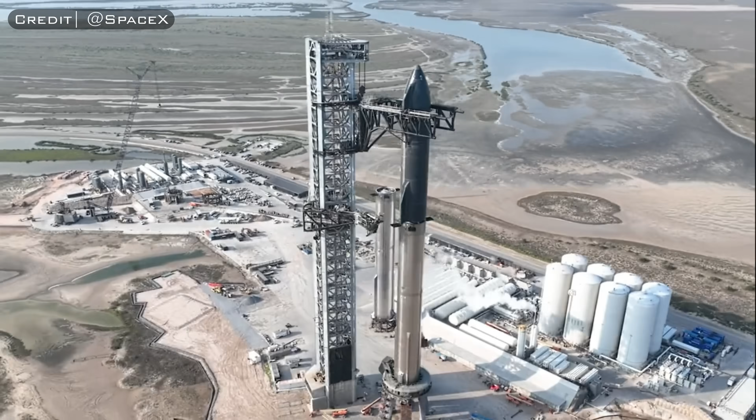Meet Starship, the largest and most powerful spacecraft ever attempted. Skipping over all of the incremental milestones that will come before, SpaceX's long-term goal for Starship is to enable them to send 1 million humans to Mars by the year 2050. I know, right? Sounds like a pretty tall order.

To accomplish this, Starship will not only have to be 100% reusable, but it must be rapidly reusable. In this case, the word rapid means we should eventually expect to see multiple launches in a single day from the same launch pad. For this reason, the vehicle, and more importantly the launch system, will need to be extremely robust. But what does a robust launch system even look like?

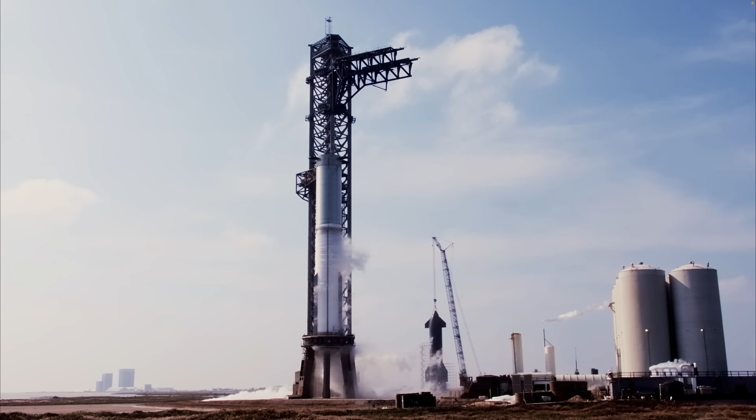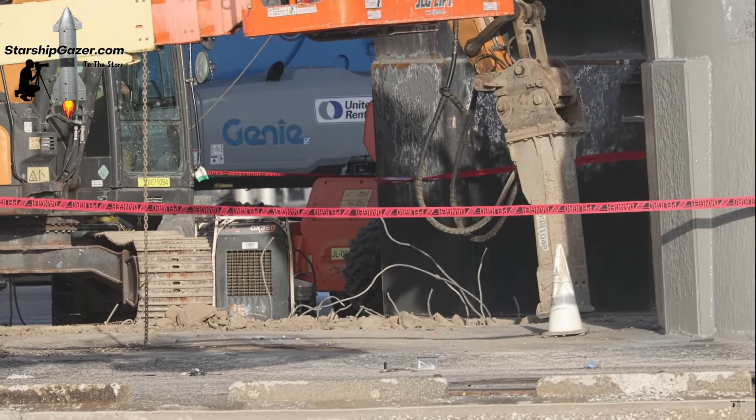Well, for one, it won't be partially destroyed every time the Super Heavy booster ignites more than 10 of its Raptor 2 engines. Following both of the last two static fire attempts, we have seen SpaceX replace the concrete pad underneath the launch mount, even after upgrading it to a higher strength, explosion-resistant concrete blend. Each time, this required 2 weeks of work to make the necessary repairs.

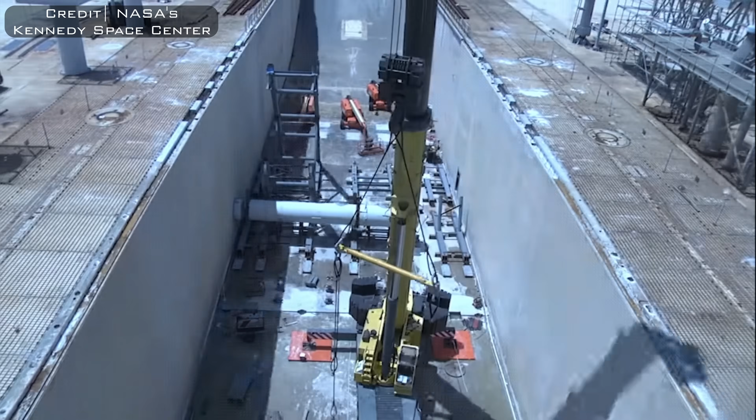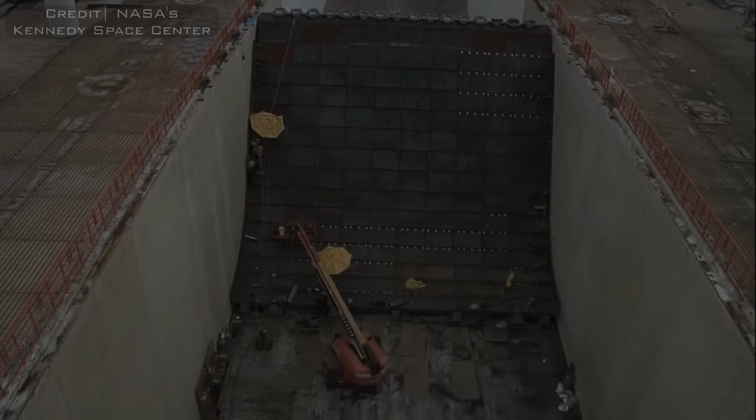As expected, this has fueled more debate by fans and critics alike that SpaceX seriously needs a flame trench underneath the launch mount. It's pretty clear that SpaceX does not have plans to do this, though. And in reality, it's not really possible without a complete redesign of Stage 0. So, should we really expect SpaceX to continue spending 2 weeks replacing the concrete in between every static fire and launch? Or is there something that we all missed?

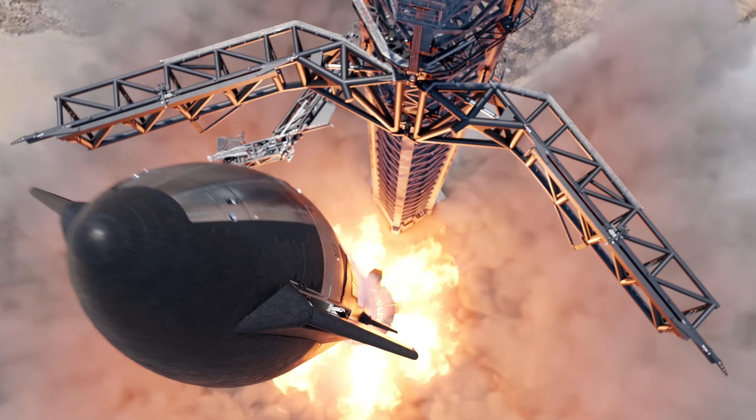There's been a lot of hype lately about whether or not this concrete pad underneath the launch mount might be the Achilles heel that will prevent Starship from ever achieving rapid reusability. For example, let's take a look at what Marcus House from the Marcus House Show had to say about it.

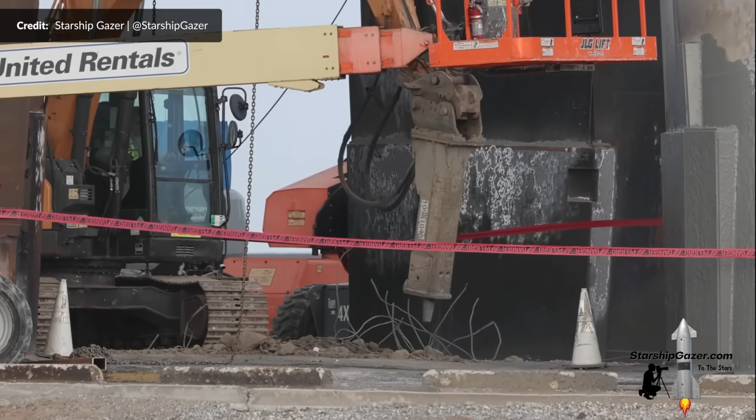I mean, we know that the ultimate goal by SpaceX with Starship is to create this fully reusable rocket. At the rate this is currently going though, maybe SpaceX should instead be setting up an expendable pad production line. I'm joking of course, but yes, it does seem like this will remain a continual problem until a new solution is found.

I even went so far as to start factoring in 2 weeks for orbital launch pad repairs into my calculations when trying to predict the most likely date of the first orbital flight test. 4 weeks if they decided to perform a 20-something engine static fire test before they jump up to firing all 33 at the same time. As you can tell by the title, I have since reversed my opinion on account of a simple yet important piece of evidence that I discovered last week.

In order for any of this to make sense, I'll need to start by giving you all a little background information so we're all on the same page about why this is even relevant in the first place. It all started the day after the 14-engine static fire test on November 14th of 2022. As of the time of recording this episode, this is the most engines we have ever seen tested on the Super Heavy booster. During this test, we witnessed something that I think we can all agree was truly terrifying, yet absolutely spectacular to watch all at the same time.

After the moment of ignition of the 14 Raptor engines, LabPadre's Rover 2 cam was shaken so hard that it caused the camera to pitch forward so it was pointed at the ground instead of at the launch mount. Initially, this was a bit disappointing. However, it forced us to focus our attention on the brief hailstorm of hot concrete as it began to precipitate into the street.

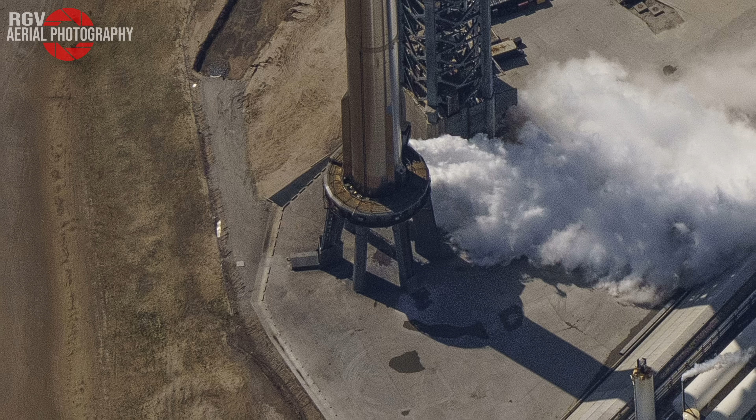There were some questions as to whether or not this was debris from around the launch pad or if it was truly coming from directly underneath it. Thanks to LabPadre's Predator camera, we were able to see the temperature of the rocks as they came to rest in the street after traveling several hundred feet through the air. This pretty much eliminated any remaining doubt as to where this material originated from.

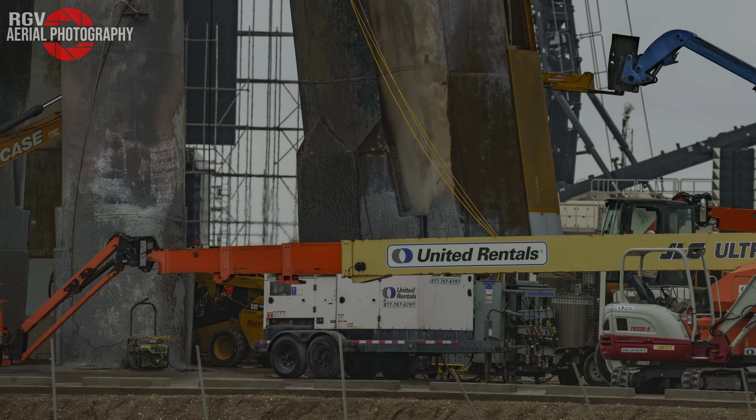Unfortunately, due to poor weather that persisted in the area for 2 weeks straight, Mauricio from RGV Aerial Photography wasn't able to perform a flyover in time for us to get a bird's eye view of the damage. From the ground, we were able to identify a single deep crater in the concrete. However, it was difficult to see much else because there was so much heavy machinery equipment underneath the table.

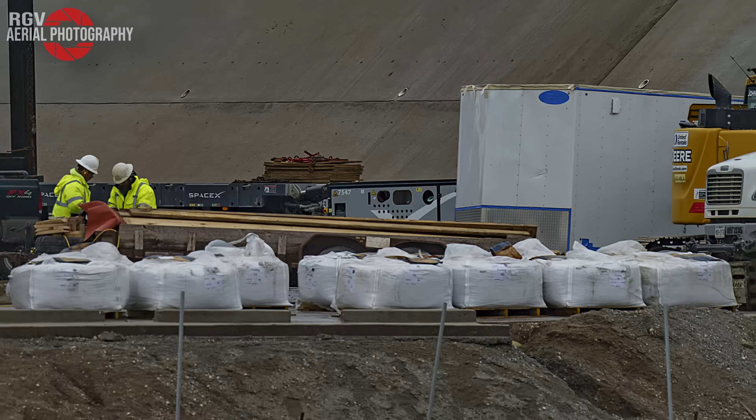What Mauricio did find, however, was several pallets with white bags on top of them, which had a label from the manufacturer with the name Fondag RS in big letters. Those of you who follow CSI Starbase on Twitter or watch the RGV Aerial Starbase weekly livestream from that week may already be familiar with this.

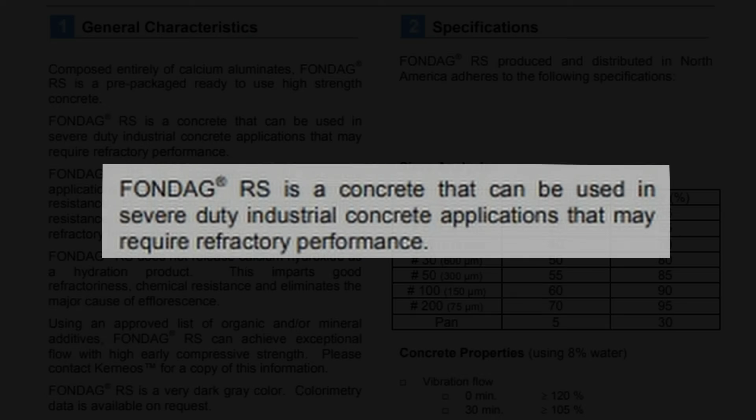Reading from the Fondag RS datasheet, we can see that inside of these 3,200-pound bags is a specialized, high-strength concrete designed for use in industrial applications that may require refractory performance. The word refractory refers to the material's ability to resist decomposition by heat, pressure, or chemical attack. This substance in particular is meant to withstand exposure to temperatures up to 2,000 degrees Fahrenheit or about 1,100 degrees Celsius. It also has a compressive strength of more than 7,500 psi.

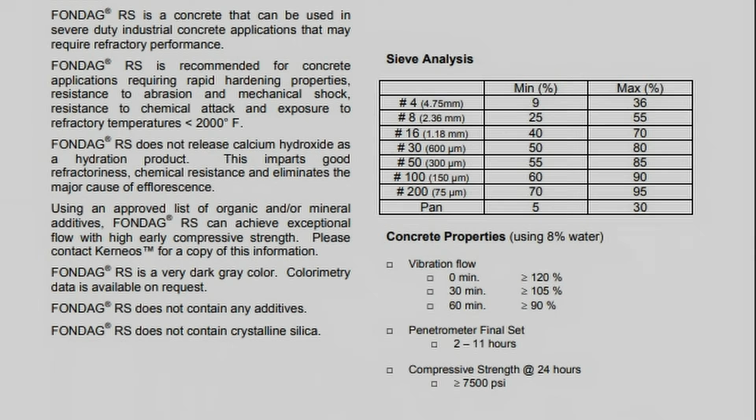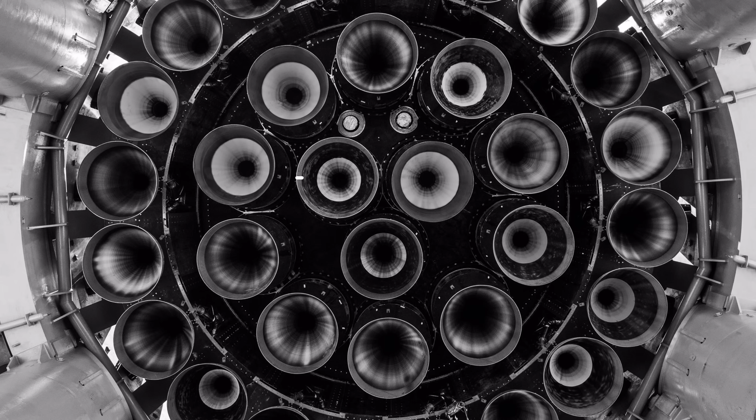So knowing this, let's do a little math to determine whether or not we should expect this material to survive the abusive smackdown that will be handed down by the Super Heavy Booster's 33 Raptor engines. Let's start with the compressive strength first because that's the easiest to explain. I'm going to simplify this by only considering a single engine here. According to SpaceX, the diameter of the exit of the Raptor 2 engine is 51.4 inches, which gives us an area of 2,075 square inches.

Now, let's make a few assumptions here. First, let's say that 100% of the thrust generated by this engine is applied directly to the ground. Let's also assume that the area this force is being applied to is a circle of the same radius as the nozzle exit. To all of you engineers out there, the reason I'm making these assumptions is to provide an overestimate for the destructive potential of these engines. In reality, the plume will spread over a larger radius, and the force exerted on the ground will be significantly diminished.

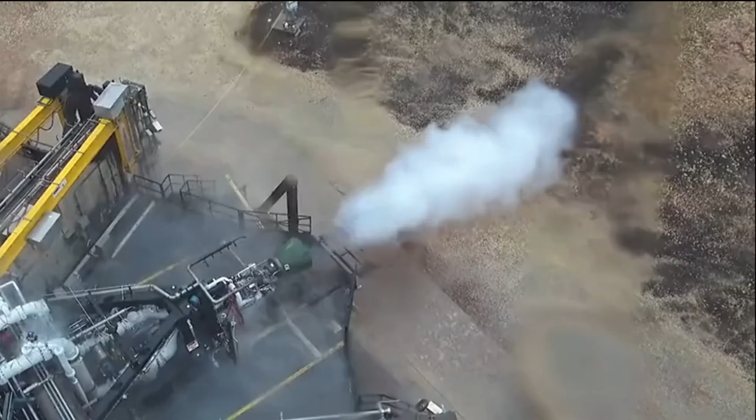Raptor 2 engines are known to produce at least 510,000 pounds of thrust. Dividing that by the area of the circle gives us 245 pounds per square inch. This is well below the 7,500 psi that this concrete is rated for. By my calculations, this Fondag RS should be able to withstand up to 30 Raptor engines all pointing down at that same 51-inch circle at the same time.

Okay, so now that we know that the Fondag RS is more than strong enough to withstand the compressive force of the exhaust flow, let's talk about its resistance to thermal energy. The reason thermal energy is an important consideration is because of the tendency for concrete to explode if it's heated up beyond a certain point. This phenomenon is called spalling. The reason it happens is because even after it's cured, there is still residual moisture trapped within the concrete. If the concrete is exposed to temperatures exceeding 212 degrees Fahrenheit, which is the boiling point of water, the moisture in the concrete will turn into steam.

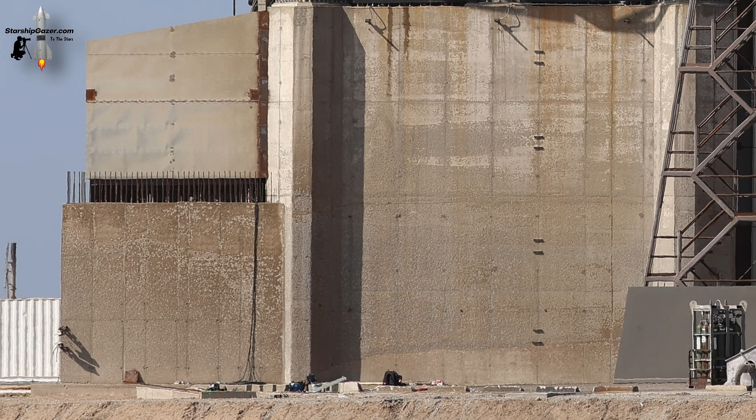The formation of steam will cause pressure to build up inside of the pores of the material, and without anywhere for the steam to escape to, the pressure will exceed the strength of the concrete and cause fragments to break off in an explosive manner. You can see evidence of this all over the base of the Orbital Launch Integration Tower. It's important to note that the more heat you apply, the more severe the spalling damage will be, especially if it's over a large area.

So we need to know what kind of temperature to expect on the surface of the pad underneath the launch mount. Again, we're going to simplify this down to a single engine. It was difficult to find the temperature data for the Raptor exhaust plume, but luckily one of our agents, codenamed Oscar the Grouch, was able to locate some information in Appendix G of the FAA's Programmatic Environmental Assessment. The purpose of this section of the report was to estimate the far-field exhaust constituents of the SpaceX Raptor 2 Methalox booster rocket engine firing under sea level conditions.

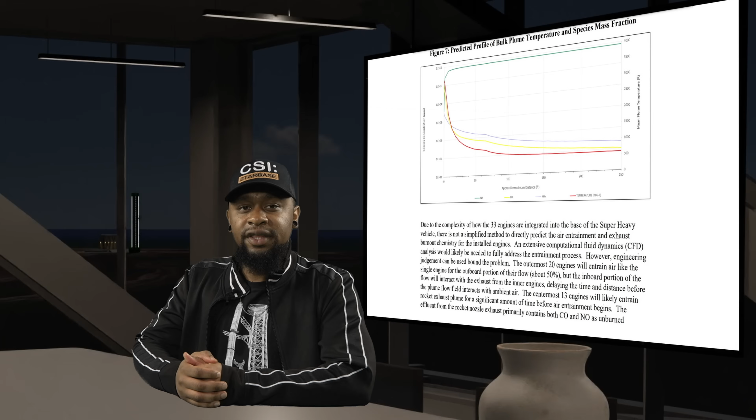Essentially, this was an emissions test, which conveniently included a table showing the predicted exhaust plume temperatures at different distances below the exit of the nozzle. We can ignore the green, blue, and yellow lines and just focus on the red one. From this data, we can see that as the exhaust leaves the nozzle, the temperature of the plume will be around 3,500 Rankine, which is equal to about 3,040 degrees Fahrenheit.

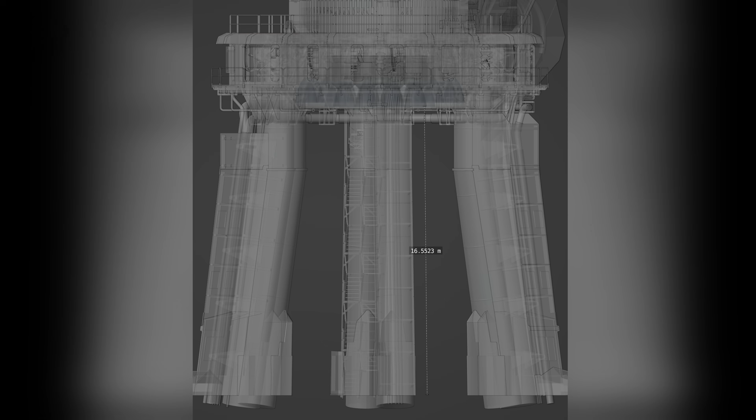That's pretty hot, and it's actually on par with the temperature from the exhaust of the Space Shuttle solid rocket boosters, which are also used on the Space Launch System. Now, in order to determine the expected temperature on the surface of the concrete, we need to know the height of the bottom of the engine bells. Thanks to Ryan Hansen Space, we can say that this is roughly 16.5 meters or 54 feet above the pad.

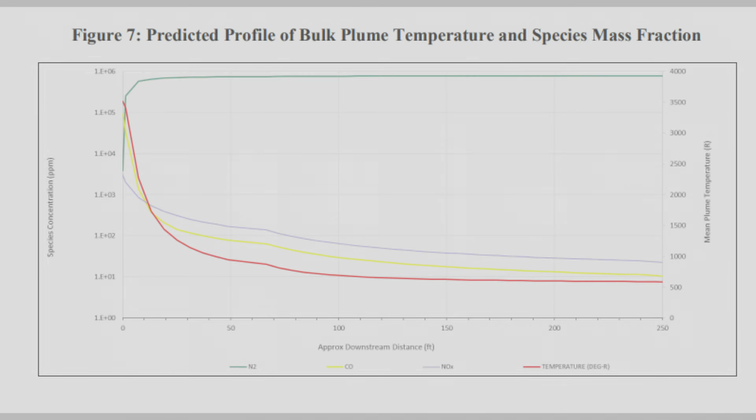So according to this chart showing the drop-off in temperature as a function of distance, at 54 feet, we should expect the exhaust plume to have cooled to about 800 Rankine, and that's 340 degrees Fahrenheit or 170 degrees Celsius. Not as hot as you might expect. However, this is still hot enough to cause the spalling effect in regular concrete, which is something we have clearly seen on each of the static fire attempts so far.

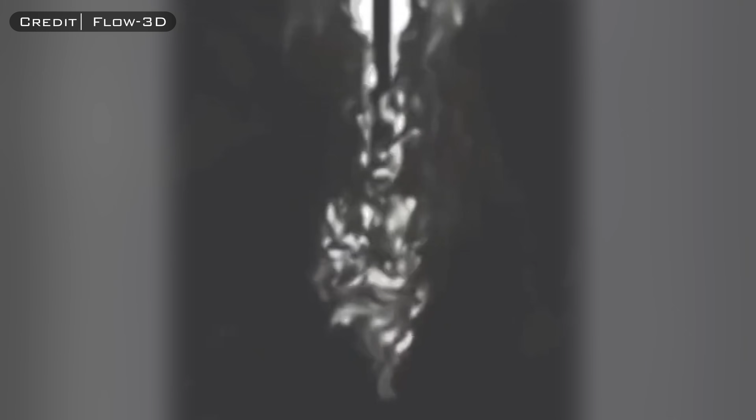This datasheet does not provide information for what to expect during a 33-engine static fire test, however, and that is important to note. During a single-engine test, the exhaust plume is surrounded by ambient air. The exhaust flow will mix with the ambient air along the boundary layer, which is called air entrainment. This rapid air entrainment is what causes the drop in temperature downrange. When all 33 engines are firing, the dynamic of this situation changes completely.

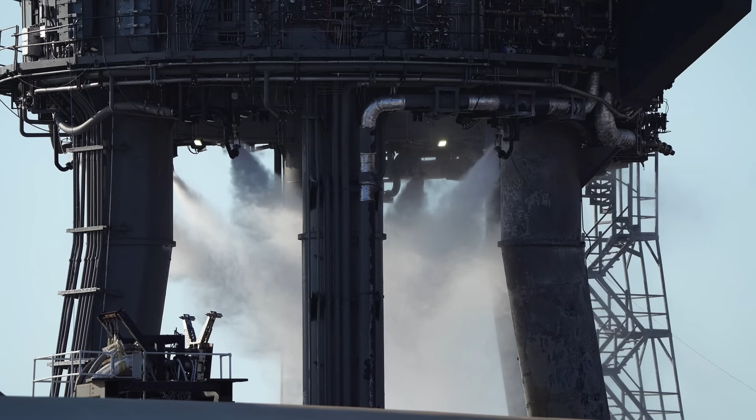Let's consider the outer 20 engines first. Looking at this from below, you can see that on what SpaceX refers to as the outboard side, the exhaust flow will experience entrainment with the ambient air. To some degree, it will also be affected by the Firex and detonation suppressant system, although that feature of the launch mount is not given consideration in this report.

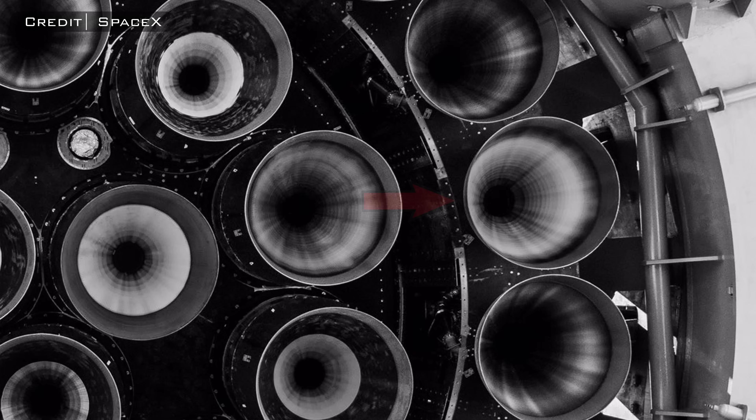On the inboard side, there are 13 center engines firing at the same time as the outer 20, so instead of mixing with ambient air, it will actually experience exhaust entrainment. This exhaust entrainment also happens on the sides facing the two adjacent engines on the outer ring. According to the report, this is approximately 50% exhaust entrainment for the outer 20 engines, but for the center 13, it's 100% exhaust entrainment. There is no ambient air inside of this column of fire to help with the cooling of the exhaust flow. So in the center of the pad is most definitely where the highest temperatures will be found, although we don't know the exact value to expect.

So 340 degrees is our low-end estimate, and as long as it doesn't exceed 2000 degrees towards the center of the pad, then this Fondag RS should do the job. Keyword should.

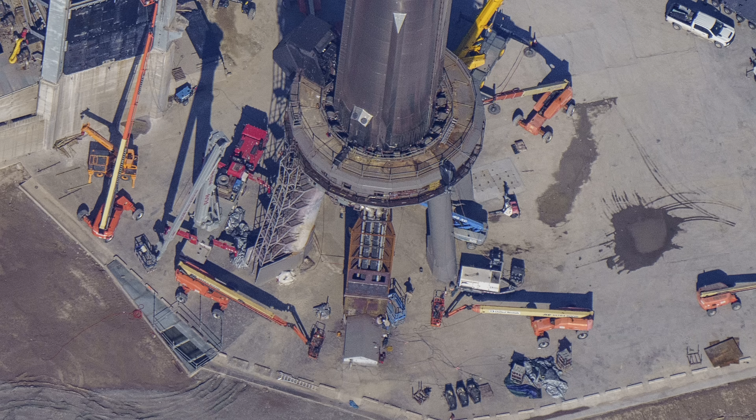All right, so continuing where we left off, we now know that Fondag RS should be more than capable of surviving the brutality of the Super Heavy Booster's 33 Raptor 2 engines. On November 27th, Mauricio took this photo of the freshly placed pad under the launch mount. From our understanding, this was taken the same day that the Fondag was laid. You can even see the power trowel still down there applying the finishing touches to the pad.

Less than 48 hours later, on November 29th, after giving it the absolute minimal time to set and cure, SpaceX performed an 11-engine static fire test. There were fewer engines tested here than in the previous one, however, it was for a longer duration because SpaceX wanted to test the autogenous pressurization system on Booster 7.

At first, we thought the new pad held up pretty well. It appeared there was less debris this time, but that was until we checked Epic Spaceflight's hoop cam and realized that the same concrete hailstorm occurred yet again. Apparently, the wind was blowing more to the north this time. The amount of shrapnel seen falling from the air was significant, but it wasn't as bad as the previous test.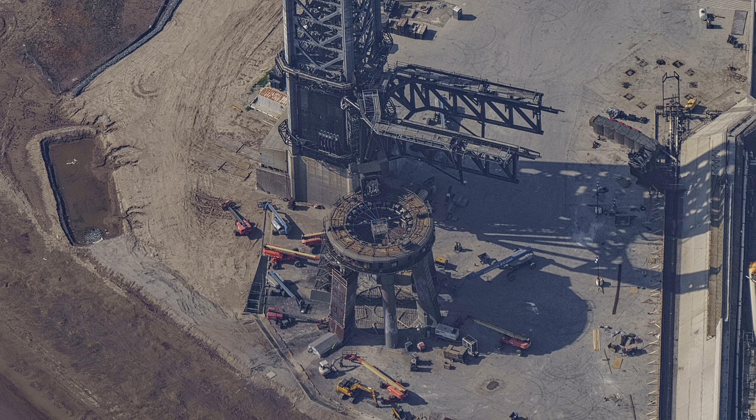This time around, we were able to get an aerial view as they began preparing the foundation for laying more Fondag underneath the launch mount. I think when these images came out, a lot of people were confused about what was going on here, and there was speculation about a possible flame diverter being installed under here, but what you're seeing here is just wooden framework laid out in a pattern.

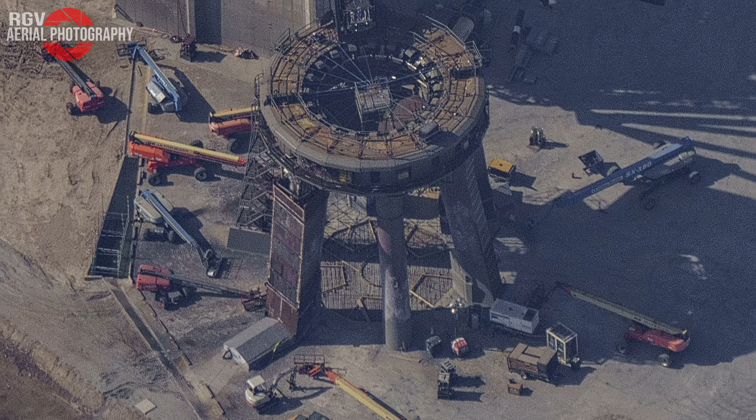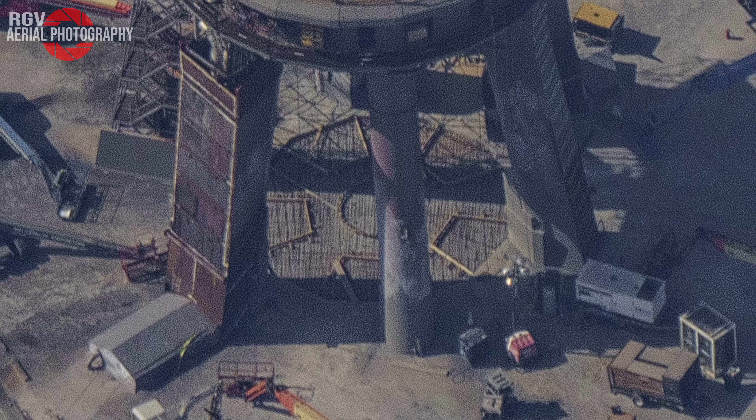This pad is very large, so it must be laid out in sections instead of doing the whole thing at one time. Once the areas that are enclosed in formwork are completed, the forms are removed and then the edges of the concrete become the forms for the remaining sections. Nothing really special going on here. So over the next week, SpaceX used the Fondag RS to reform the pad. The bags had been temporarily moved near the suborbital side of the launch complex to get them out of the way during the previous static fire.

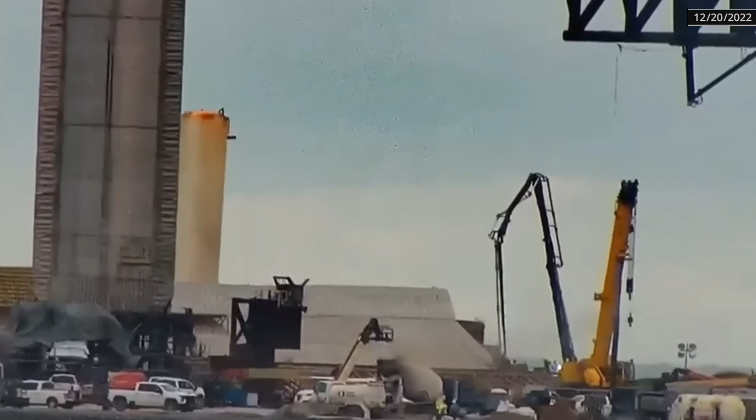SpaceX brought in an empty mixer truck for the special job. It was a difficult one too because the wind was clearly not cooperating as they tried to empty the 3,000-pound bags into the hopper. Anyways, when it was all said and done, this is what it looked like. The full process took 2 weeks from start to finish.

So here's the question that's still on everyone's mind. Is SpaceX going to have to spend 2 weeks repairing the pad after every static fire that involves more than 10 engines and after every launch? If such a major part of the orbital launch pad is essentially expendable, don't we have ourselves a major problem here? Well, here's where the plot twist comes in. I think that we all need to chill out and give SpaceX another chance to prove that this really isn't an issue like we think it is.

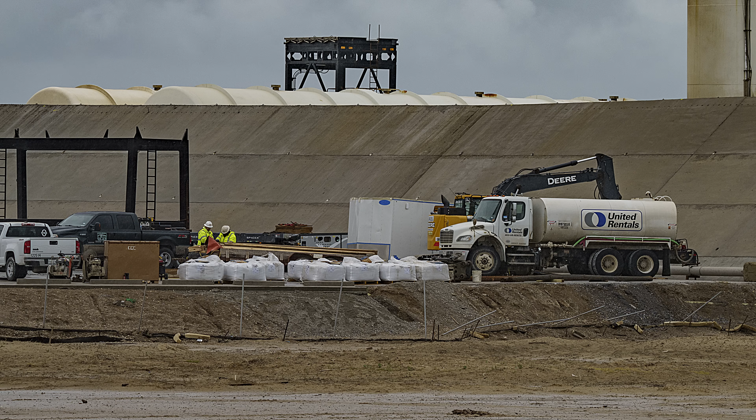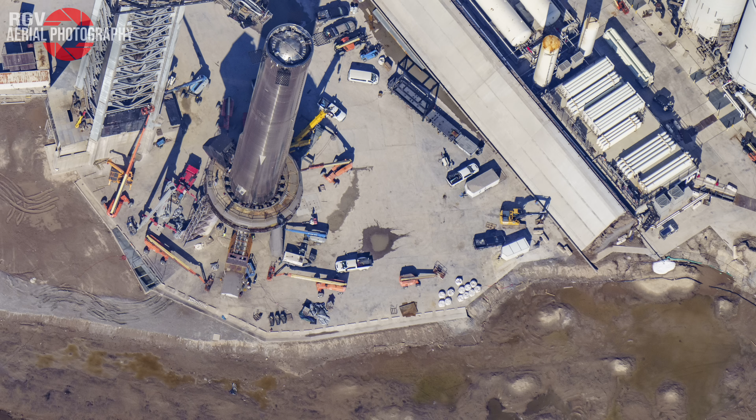And here's why. These bags were originally delivered before the first time the pad was replaced on November 18th. It's hard to tell from this angle, but there were exactly 13 bags of Fondag RS on the ground in this image. We can match this up with the aerial view that was taken by Mauricio a week later on November 27th after the job was completed. So these are the same 13 bags that were originally delivered. The bags were moved over near the suborbital pad during the static fire test.

I think the disappearance may have fooled a lot of folks, myself included, that this Fondag had actually been used, but in reality, it wasn't. I think the fact that SpaceX performed the static fire within 48 hours of completing that first job probably should have been a big hint of what was going on.

Reevaluating the situation, I think that SpaceX was preparing to install the Fondag RS after the 14-engine static fire, but they decided that they wanted to get the autogenous pressurization test completed as quickly as possible before they sent the booster back to the Megabay for its final upgrades.

In other words, this was a brand new concrete pad that was intentionally sacrificed. The booster actually did SpaceX a favor by removing a lot of the material for them so that they didn't have to do as much work to rip it out when the time came. I think that during the upcoming static fire tests, we will see much better performance out of this pad, and hopefully, it won't have to be replaced again for a very long time.

If I'm wrong about this, I welcome you all to search me out on Twitter and send all of the hate mail you can muster. I may not always reply to DMs, but I do try to read all of them, which is how I knew that a large portion of you were concerned with this situation in the first place.

Okay, so I think there's one important disclaimer to add here. While I don't believe we will see the pad directly underneath the launch mount sustain the same damage that we have seen in these past tests, the same cannot be said for the surrounding concrete. From the aerial view, you can see that on the perimeter of the legs of the launch mount, there is regular Portland cement outside of the Fondag pad in the center. This concrete will continue to experience constant degradation over time as engines are tested on the launch mount.

In front of the berm, SpaceX has also added a large step to what was originally just a continuous ramp from the bottom to the top. I think that the purpose of this step is to prevent debris from rolling across the ground and then being launched over the ramp. The placement of this nearly 10-foot tall step will cause the ground debris to collect along the wall or be pushed to the left where most of it will wind up on the pad, or to the right where it will land inside of their designated collection basin.

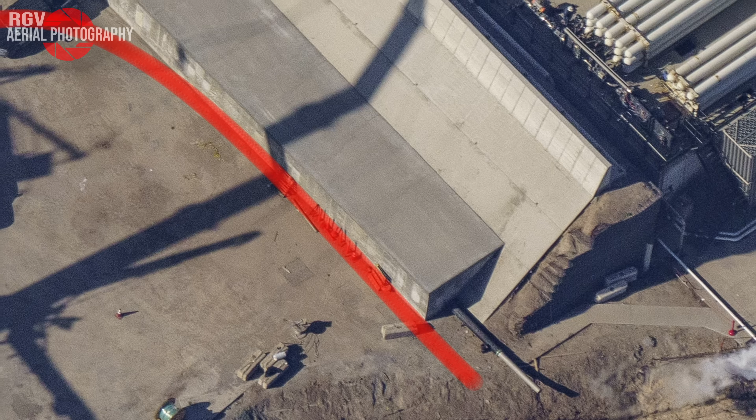The wall has a secondary function to protect the pipe that is encased inside of it. This is the detank drain for the 2 cryo testing stations next to the berm. Anyways, I know that even though I have recommended that we all be patient and wait to see what happens during the 33-engine static fire and launch, there will inevitably be comments to this video that mention the need for a real water deluge system.

If you are one of those people, then I have some good news for you. This is pure speculation, but I believe that SpaceX is planning to add in a water deluge system to this launch mount sometime after the first or second orbital flight test. A few weeks ago, we noticed that several unremarkable-looking sections of black pipe had been delivered to the Massey's test site, located a few miles from the Starbase facility.

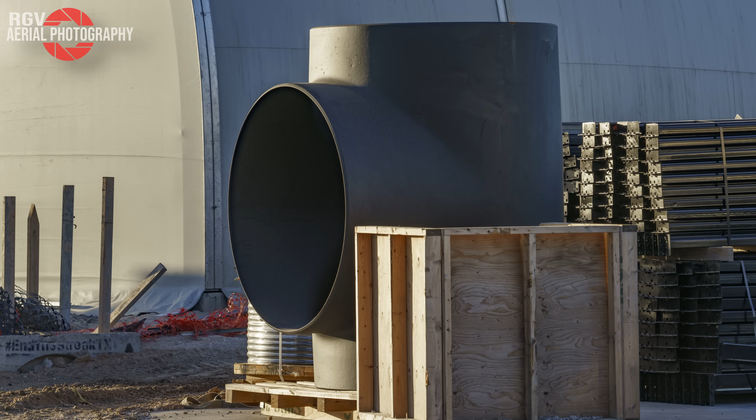What we can see here are 2 black T's that look like this, and 4 curved elbow sections of pipe. Looking at some of the surrounding material on the ground, we can estimate that these pipes have a diameter of about 4 feet. Located just a few feet away from these pipes are 3 large valves, which are clearly meant for water, given that they are short-stemmed valve actuators. If these were for cryogenic fluids, the valve stems would be much longer, similar to these ones. I am convinced that this is the beginning of a water deluge ring for the Orbital Launch Mount.

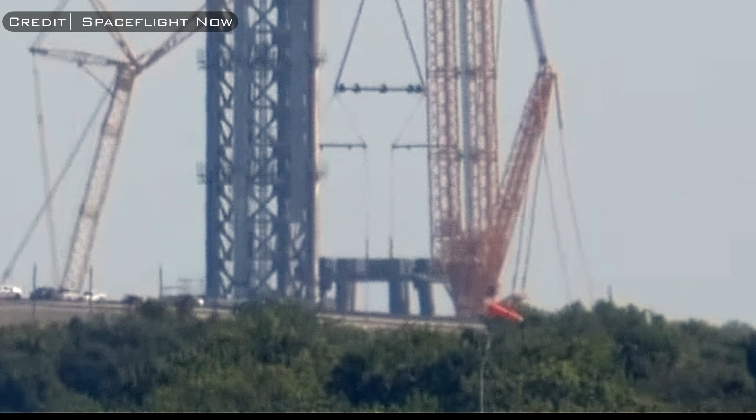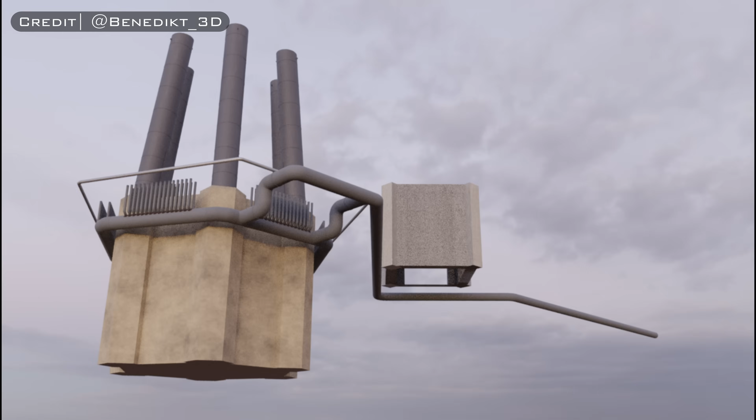If so, it will look very similar to the one installed around the second launch mount at Pad 39A a few months ago. Thanks to this render from Benedikt 3D, you can see what this massive water deluge ring looks like. It has 6 corner pipe sections and 2 T's located on one side, which serve as inlets for the water supply. The only thing missing is 2 more corners and the 6 straight sections that connect them.

Although I think we may have found those as well. We located these 6 pipes delivered to the Sanchez site last week. You can see that one of the T sections had been moved over here as well, which suggests we might see construction of this large manifold begin within the next few weeks.

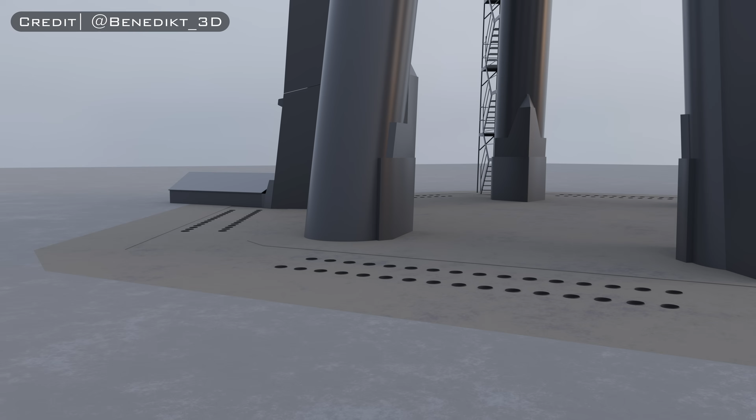Once complete, it will be buried underground around the perimeter of the launch mount. Unfortunately, there's already a large amount of pipes in the ground surrounding the OLM, so there's a good chance that this deluge ring will have to be constructed in sections instead of lifting the entire assembly in at one time.

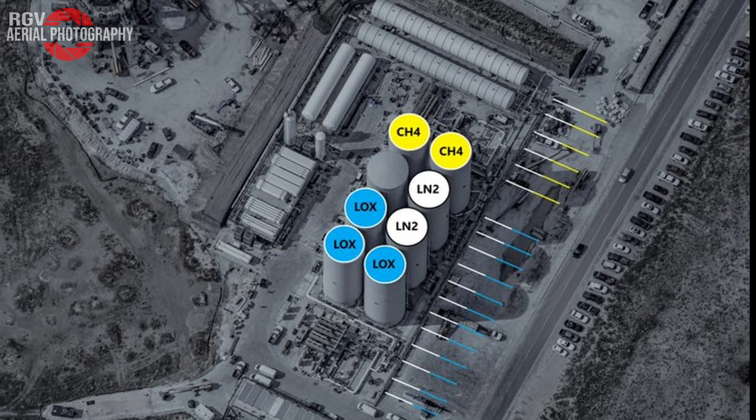The next question we have to ask ourselves is, where will the water supply come from? There are 2 options here, and one of them is a little more difficult to pull off than the other. The first option is using the 2 existing water tanks at the Orbital Tank Farm. These were converted over from being methane tanks last year after the original water tank was damaged.

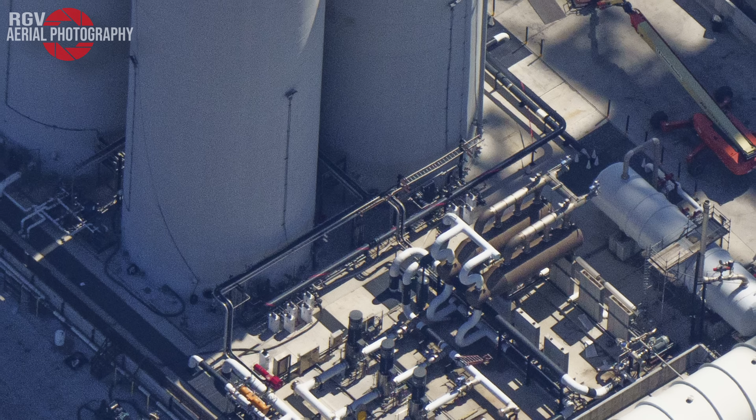So, even though these have been converted to water tanks, the existing water supply that taps into these is way too small to supply the amount of water required by this deluge system. These black pipes on the ground are about 19 inches in diameter, versus 48 inches in diameter for the water deluge pipe. Over the last few months, I have noticed that SpaceX has been adding in additional pipe racks that seem to be running towards the discharge side of the water tanks.

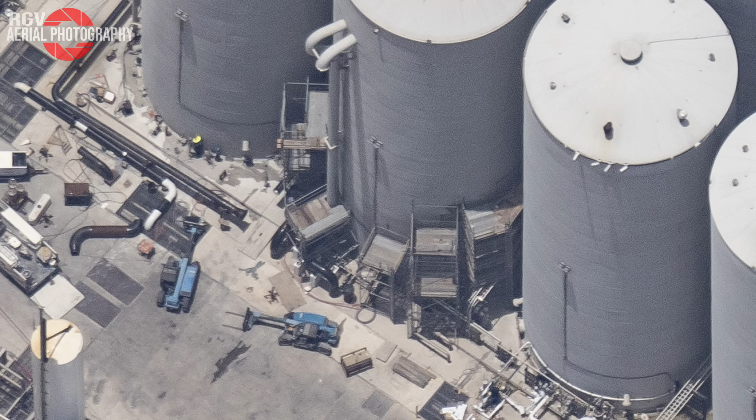It's possible that we could see significantly larger pipes added here to supply the water deluge system. Or we may even see the previously damaged water tank be put back into service. Another option would be constructing an additional water tower somewhere closer to the launch mount that would require a lot less work to route the pipes over to the structure. It would be really difficult to run pipes underground from this location.

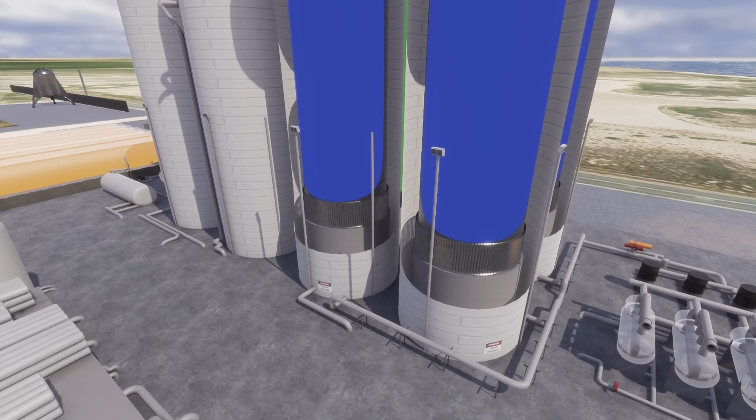The main reason for assuming that this is not a water tank is because it is double-walled like the cryogenic storage tanks at Starbase. The void space between these tanks is filled with expanded perlite for thermal insulation, and there should be no need to insulate a water tank. There are a few key differences between the tanks at Starbase and the one that we are seeing here.

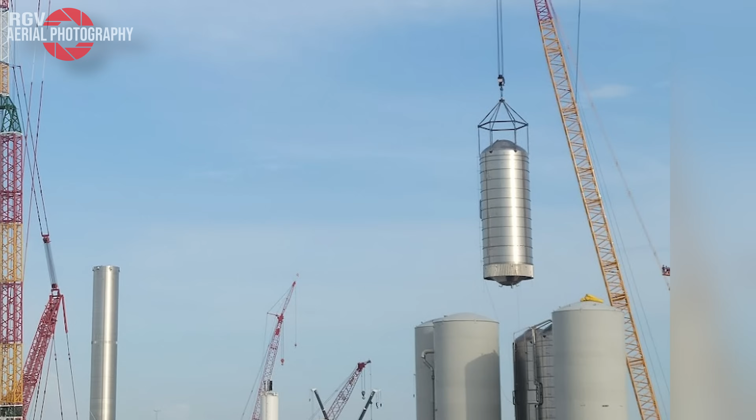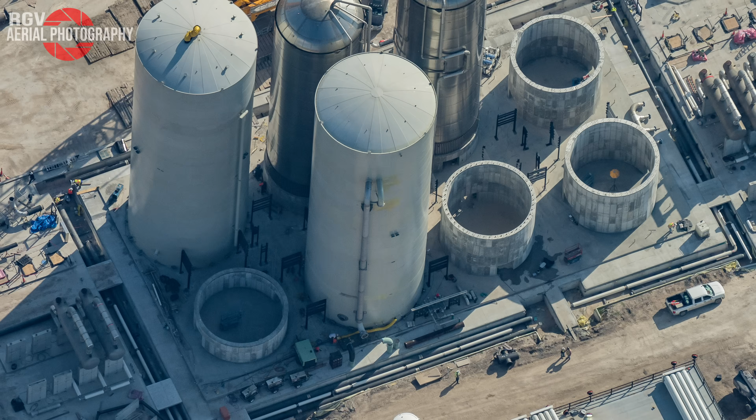For one, the inner storage tanks inside of the cryoshells at the Starbase tank farm were constructed with rounded domes at the bottom, whereas the one at Pad 39A is actually just a flat bottom tank. This actually makes it more similar to the original water tank at Starbase. For this tank, SpaceX welded steel plates together to form a flat circular base. The water tank was placed on top of this and bolted to the ground.

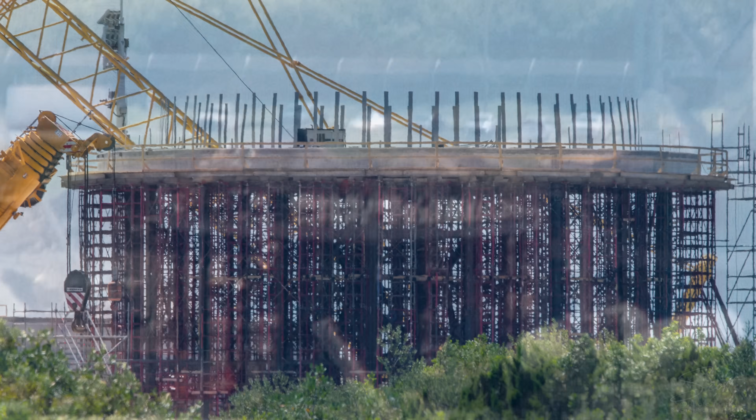Returning to Pad 39A, the interior storage tank here was constructed the same way, with a flat bottom, which seems to be an irregular method of constructing a cryogenic storage vessel. The second difference to note is the elevation of the tanks. Raising the height of the LOX storage tanks so that it's 15 meters or so higher than the ones at Starbase doesn't really make a lot of sense.

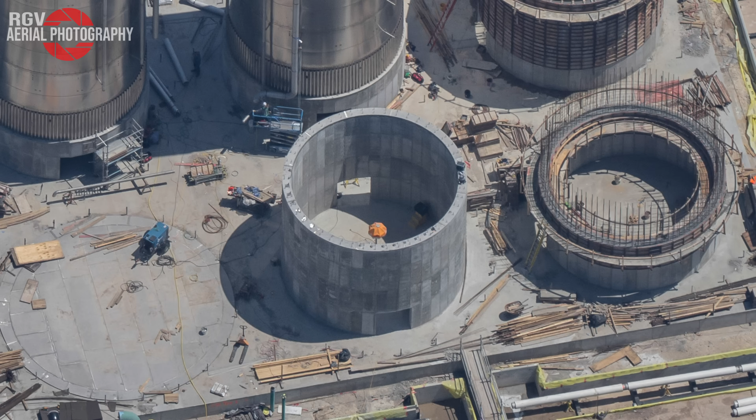It's definitely an advantage when it comes to providing head pressure for LOX pumps that are used to fill the booster and Starship, but the pumps at Starbase seem to do just fine with the tanks mounted lower to the ground. Can't really say the same for the pumps on the methane side, but that's a completely different story. The increased elevation of this tank is one reason our team is still on the fence about this being a water tank. Having it raised this far off the ground could make it useful for a gravity-fed water deluge system.

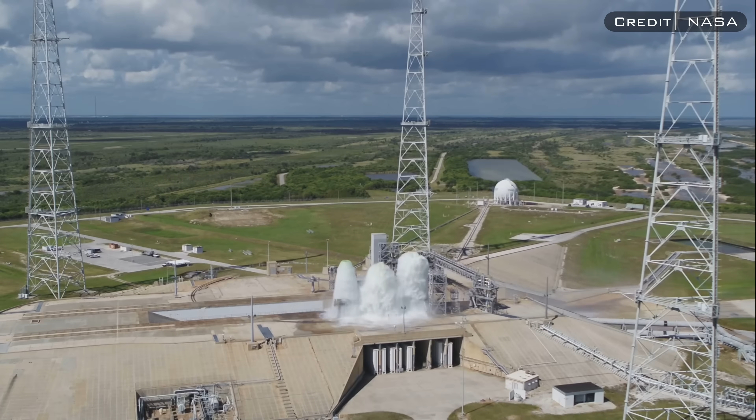Now, this is nowhere near as tall as the water tower used for the Falcon 9 water deluge system, but this is where the double-walled tank comes into play. In order to move water at the rate needed for a deluge system, you need a pretty decent amount of hydrostatic pressure. As an example, the Falcon 9 water tower is more than 290 feet tall. At this height, the hydrostatic pressure would be 125 psi or 8.6 bar.

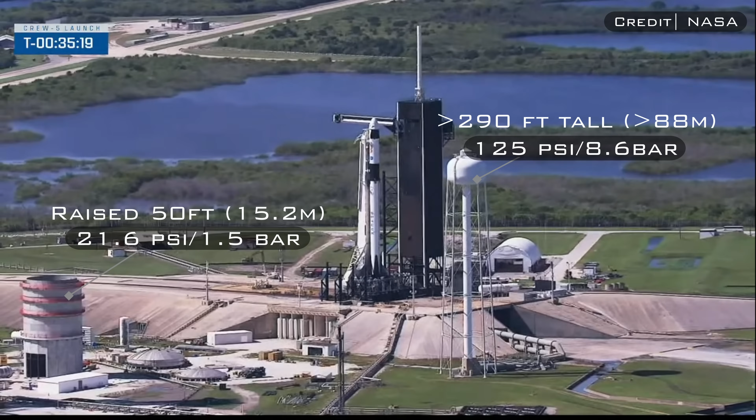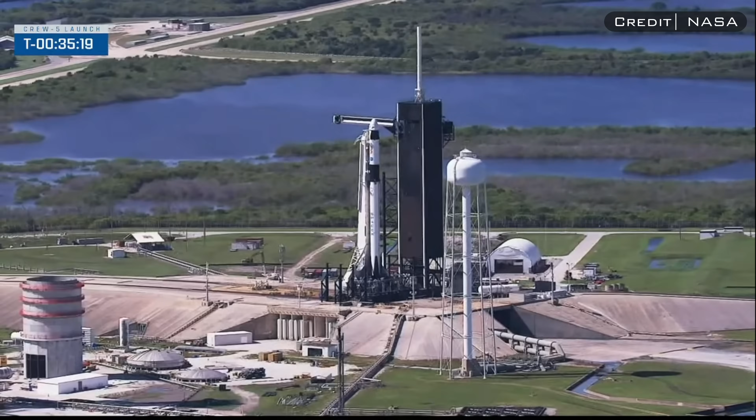The large double-walled tank is raised about 50 feet off the ground. This gives us 21.6 psi or 1.5 bar. This is a difference of roughly 100 psi or 7 bar of static pressure between the outlets of these two tanks. One possible option to make up the difference is to use vaporized nitrogen to pressurize the water tank and force the fluid out at the same pressure that it would be if the tank was mounted 240 feet higher. The problem is, 7 bar may actually be pushing the limits of what the tank is designed to hold.

One way around this would be to pressurize the void space in between the shell and the storage tank. By doing this, you can generate an opposing force to the 7 bar of pressure being exerted on the wall of the tank from the inside. So if you pressurize the void space up to 5 bar, then there will be 5 bar pushing in on the outer wall of the water tank, which counteracts the 7 bar that's pushing out. This means that the net force being experienced on the walls of the tank would be reduced down to 2 bar.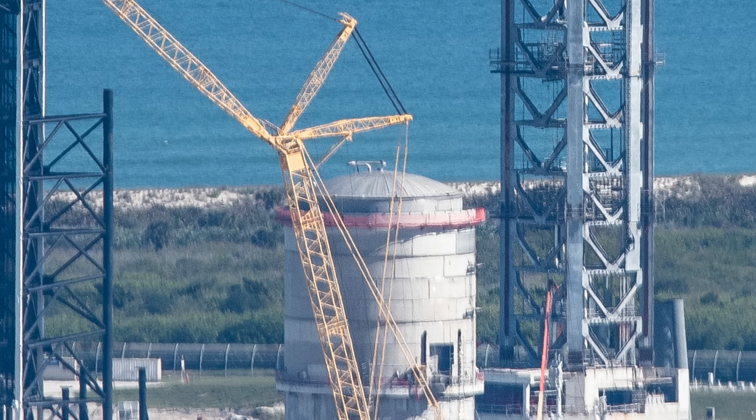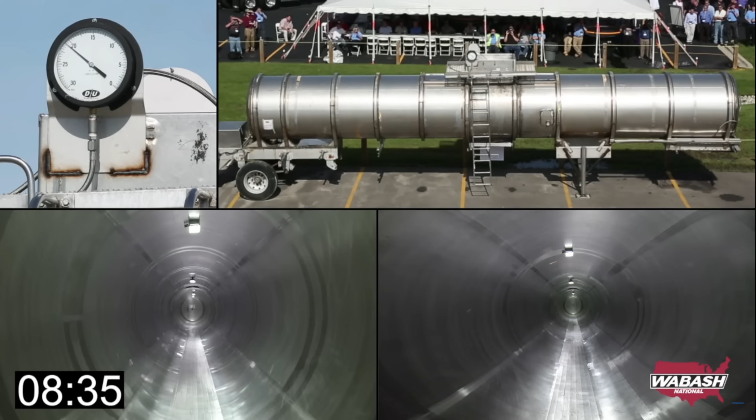As the water is draining, more gas will need to be pumped in to replace the volume and maintain pressure. This would explain why there is a pipe going into the top of the interior storage tank. This could be used for injecting nitrogen to regulate pressure. The key is to make sure that neither tank exceeds its designed load rating. I would go deeper into this, but I'll just leave it there for now.

Anyways, whether SpaceX decides to use their existing water tanks or construct an entirely new one, they're going to need to run a lot of pipe in order to get it from point A to point B. If you've been watching NASASpaceflight's Space Coast livestream this week, you may have seen tons of equipment as it was being moved to the turn basin at the Kennedy Space Center complex. This is clearly part of the Water Deluge System and is made of some pretty interesting looking pipe manifolds. In particular, the ones that have gotten the most attention over the last week were these ones shown here.

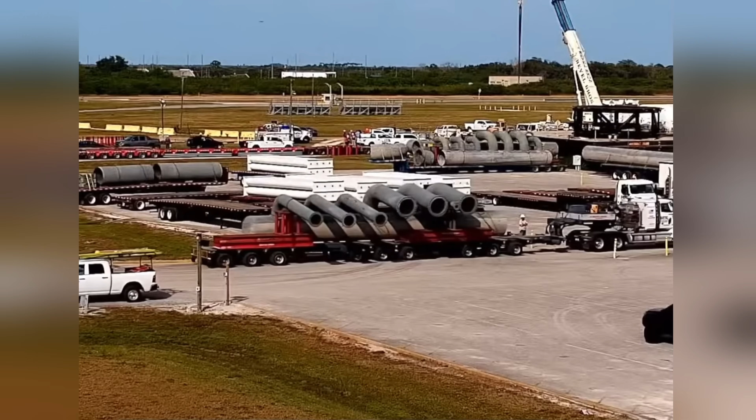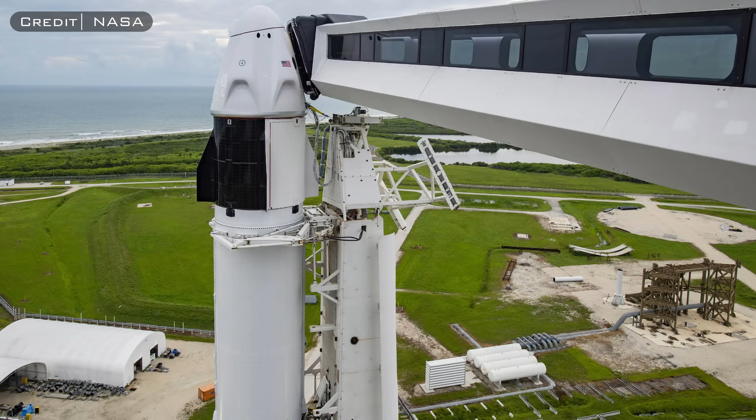The most interesting part of this manifold is not what it's used for, but where it came from. What you are looking at here is the original Water Deluge System for the BFR flame trench. That's right, the original purpose of this manifold and pipes was to supply water to what was originally planned to be the test stand / launch pad for the BFR rocket. The stand used to sit right here in this location, but was demolished in 2021. The only thing remaining from it is this water system.

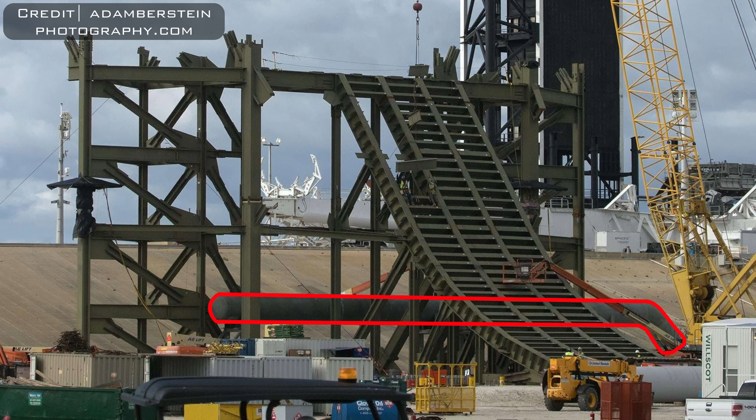This is what the stand looked like while it was being constructed. You can see the water pipes running underneath the bottom of the frame just behind the flame diverter. I'm kind of glad this was never completed because the concept drawings of what it was supposed to look like were interesting to say the least.

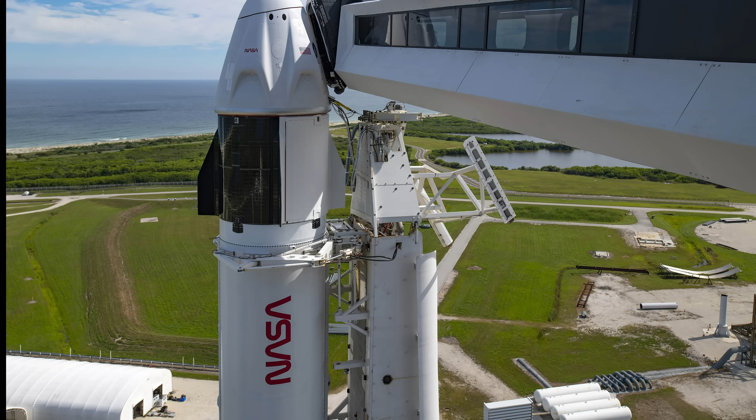Anyways, you can see here that the main water supply actually comes from the same source as the Falcon 9 water deluge. Once the 4-foot supply line reaches this location, you can see the smaller pipes that branch off from the manifold and reach over to the equivalent manifold on the other side. Half of these branches appear to be about 12 to 18 inches in diameter, while the other half are about 18 to 24 inches. It's a bit difficult to judge.

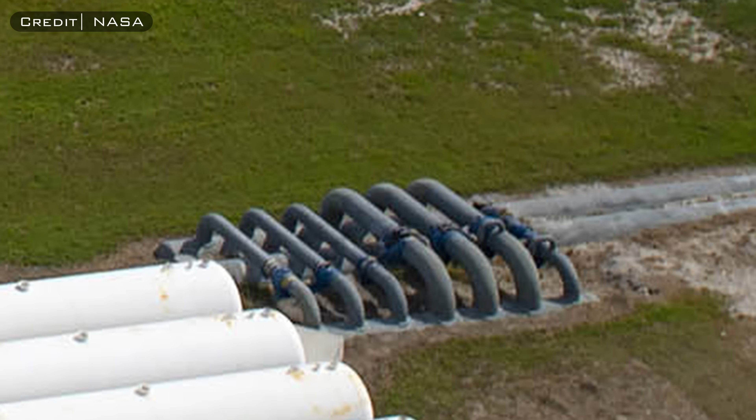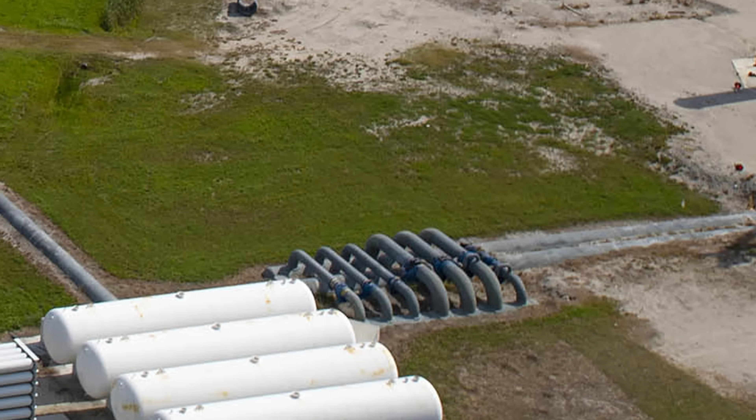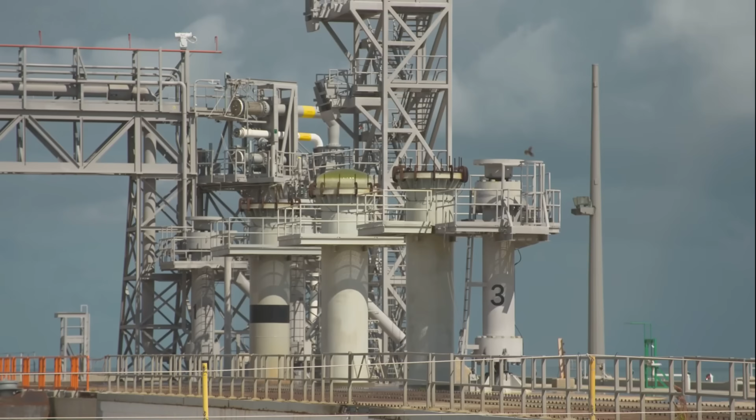The main supply breaks off into smaller branches and then rejoins into 2 separate large diameter pipes that then run all the way up to the deluge nozzles on the pad. The cool thing about this system is that if you watch the water deluge in action, you can actually see an immediate change in the flow rate every time another one of the valves open.

I didn't explain how many valves are used for the flow rate settings on the Pad 39B Deluge System because I'm hoping that some of you might be able to count them just by looking at this footage a few times and then letting me know your answer in the comments.

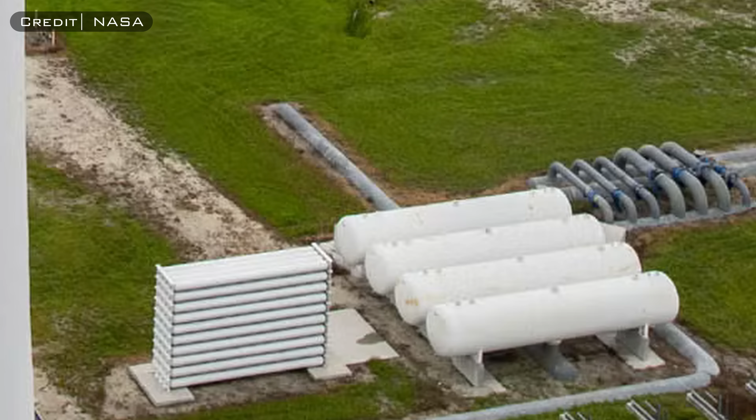There is one final component of this deluge system to mention, and I saved it for last because I'm not entirely sure of its purpose. If you take a look at these 4 horizontal storage tanks that were also loaded onto the Marmac 2680 barge for transport to Starbase, you will see that these are the same ones that were originally located near the valve manifold. All 4 of these tanks were connected together on the bottom using this straight manifold shown here with 4 ports on one side.

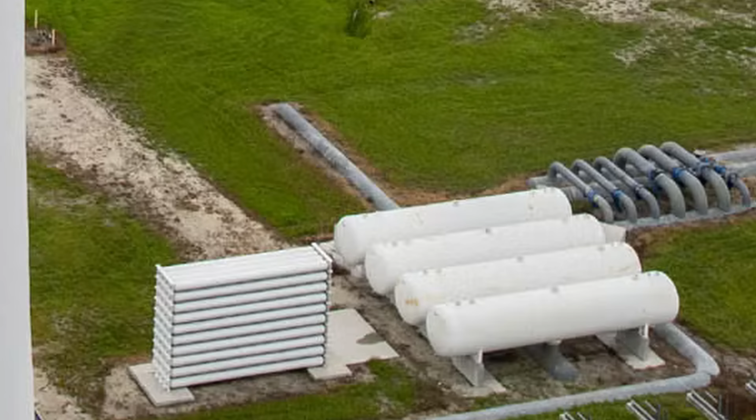I will have to study this more, but I believe these may be intended to function as a buffer tank that would reduce the effect of water hammer in the lines once the valves are slammed shut. It's difficult to know for sure because construction was never completed on this system. So with that said, we'll just have to wait and keep our eyes out to see how this is implemented at Starbase. Again, this may be a bit of a stretch based on minimal available evidence, but let me know what y'all think in the comments.